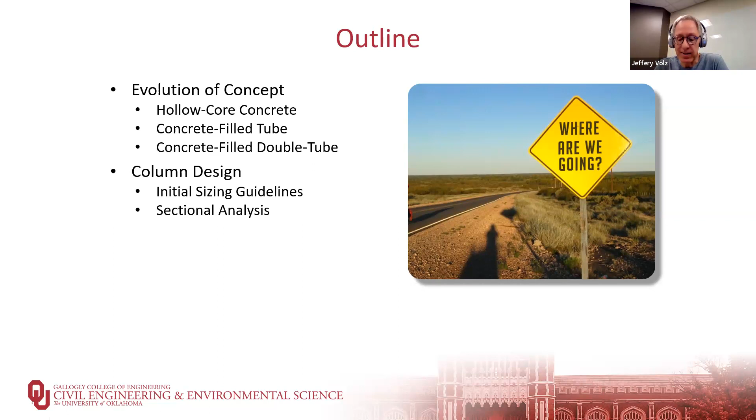I'll discuss a research project funded by the Oklahoma Department of Transportation, and a companion project funded by the ABC-UTC at Florida International. We'll talk about the specimen design and fabrication, the testing and results, and next steps in that research project. Then I'll have a number of thank-yous, because this project would not have been possible without a lot of people's help, and then I'll answer any questions you might have.

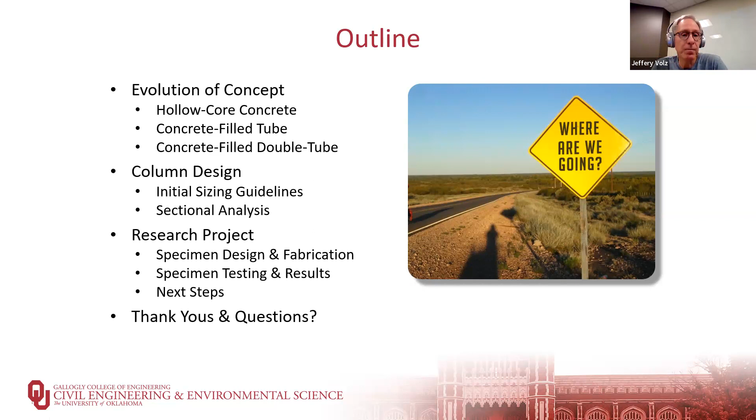Typical bridge piers will often consist of reinforced concrete columns, often circular, because it's a very efficient and relatively cost-effective method. Reinforced concrete has shown to have a high amount of ductility for some of these hazard conditions, but there are some downsides, not the least of which is the weight of these structures. So there have been attempts to reduce the weight of bridge columns and increase the speed of erection and construction of these columns, and we'll talk about all of those and how they impacted our current column design.

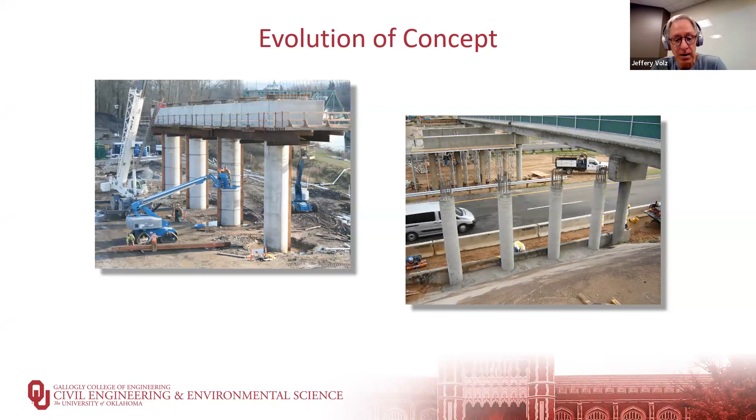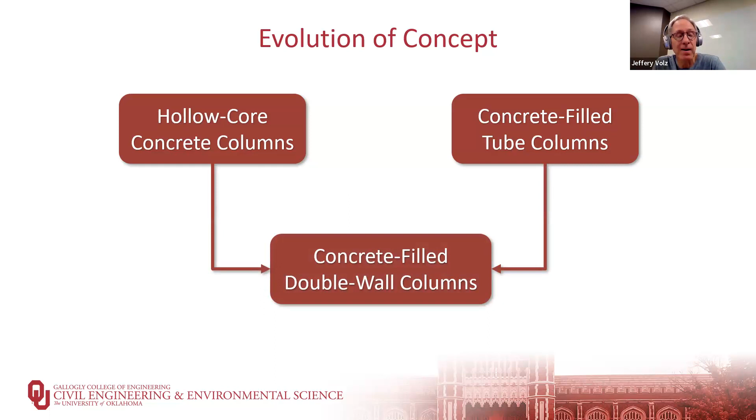Now I'm going to talk about hollow core concrete columns, reinforced concrete columns, and concrete filled tube columns. I have to talk about these sequentially, but in truth, these two concepts evolved in parallel and eventually came together in the concept I'm going to talk about today. So in terms of visualizing how these actually relate, even though I'll start with hollow core concrete columns and then move on to the concrete filled tube columns, all of that came together in the system we are talking about today.

So in particularly tall bridge piers or areas of high seismicity, engineers have looked at reducing the weight of our piers. We all understand that the columns are more efficient if we can get the material as far away from the neutral axis as possible. That increases the buckling resistance and increases the flexural resistance for less material.

Now this requires more formwork. You have to formwork on the inside and the outside of the column. And often to get the best performance, you need two layers of steel that are tied together as you would have in a typical reinforced concrete column. The reason that you need the inner and the outer layer tied together is because of the hollow core. The bars can buckle inward or outward, so you need both of them. But building that reinforcing cage is costly.

The other reason is if you have the potential for precasting these columns, you can reduce the weight of them to make them less costly for shipping and easier to erect.

Now, these columns are often tested in a constant axial load, increasing lateral load capacity. Basically, the typical specimen is a cantilever. It's fixed at the base, which is what our columns behave a lot in most of our bridge piers, fixed at the foundation and a cantilever extending upwards. They're tested with a constant axial load and a increasing lateral load based on certain loading protocols. And you see the load displacement behavior in the diagram on the right.

One of the important things to notice there is that those values up in the upper right-hand quadrant, that 2, 4, 6, and 8 mu, that is the drift ratio or ductility factor expressed as a percentage. So if you have a 10-foot tall column and it can displace up to 12 inches, then you have a ductility ratio of 10 or 10%. So you can see for this column, it behaves very well in its lateral loading.

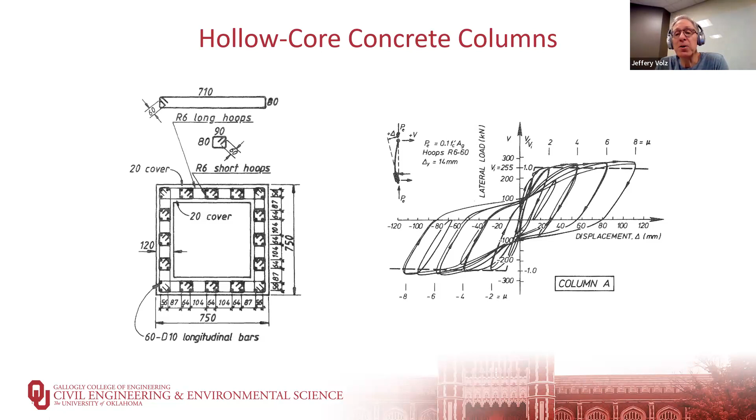This is a typical hysteresis loop. It's important to recognize that the area within the hysteresis loop is energy absorption, which helps us in these dynamic hazards that can impact our structures. So the more consistent and without degradation hysteresis loop we have, the better behavior. We see that this reinforced concrete hollow core column is behaving very well, up to a ductility ratio of 8%.

But that reinforcing cage takes a lot of manpower to build because of having to tie it together. And researchers have looked at the opportunity of using round columns, circular columns that are also hollow, with a single layer of longitudinal steel with a spiral around the outside.

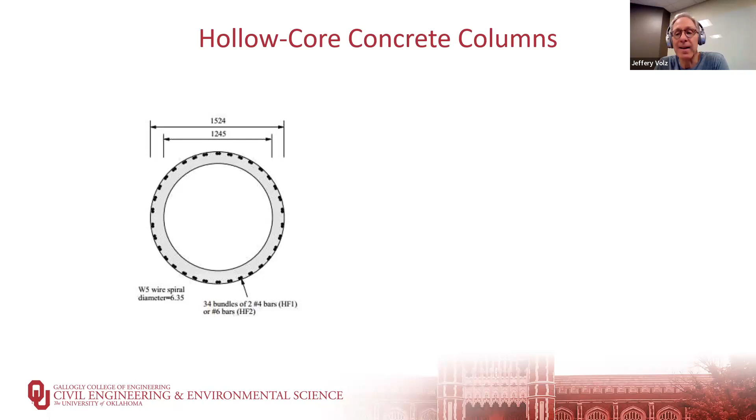And then they've tested those in a similar manner under a constant axial load and increasing lateral load. And you can see in this load deflection plot, the ductility is not as good. You can see we get up to a ductility ratio of about 3%. After that, we get significant failure of the column.

And that's because although the bars can't buckle outward because of the lateral tie, you only have the thickness of the concrete, which of course is poor in tension on the inside, and eventually the bars will buckle inward. So that's why it doesn't have as high a ductility ratio as that square column we looked at.

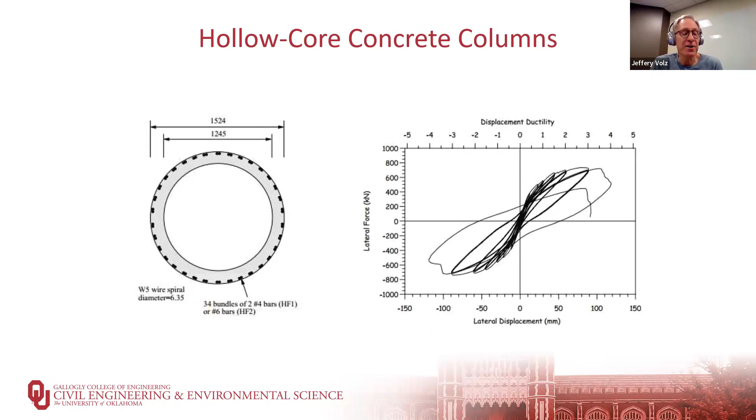Separate from hollow core concrete columns, we built a lot of concrete-filled steel tube columns. They have been used in the US. They are used very frequently in Europe and in Japan, where you use a steel tube that will also act as a stay-in-place form, which is filled with concrete to form your column.

Now, the great thing about this is you've eliminated the need for building a reinforcing cage, which is a significant time save. The steel tube acts as a stay-in-place form, so there's no formwork to erect and then remove, and it goes relatively rapidly. And this has been used in a number of instances.

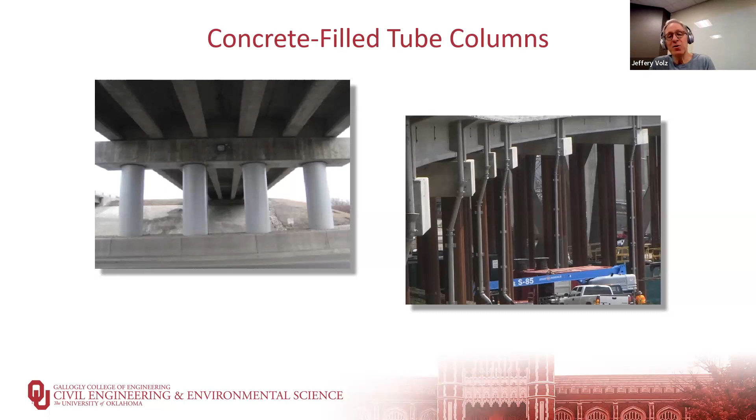It has a very good performance. If we look at the load deflection plot, same kind of specimen, fixed at the base, constant axial load, increasing lateral load, we get a very good hysteresis loop. It is a very stable hysteresis loop, which is important. And the column has reached a ductility ratio or drift ratio of 6% before it failed.

Now, it's not just that we keep that load deflection from degrading. We want basically as big an area within that hysteresis loop as possible, because that is energy absorption during a dynamic loading effect. And the more energy you absorb, the lower the resultant forces on the structure and the more durable it is in terms of strength. One of the problems, though, with these types of columns is we have to protect the steel from corrosion.

Steel is at a higher energy state, and because of that, it wants to return naturally to a lower energy state in the presence of moisture and oxygen, so it will rust. We have to paint them with epoxy-based paints or other types of paints to try and protect them, particularly in areas where we use a lot of road salt, because that will cause deterioration of the steel.

It'll start to corrode. Our bridge piers, the columns, if you have an overpass, are right in the splash zone, where that's actually the worst you can have, with constant wetting and drying combined with chlorides causing it to corrode. So that's one of the downsides. But still, it performs very well in terms of its ability to absorb energy.

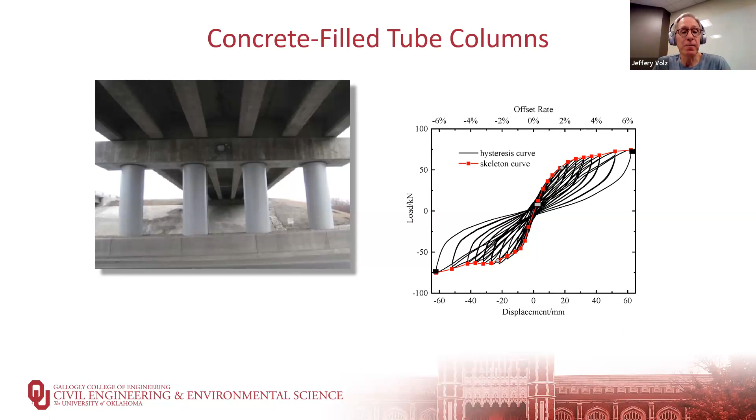There have also been developments where, instead of using that steel tube which can corrode, we instead use fiber reinforced polymer tubes that we fill with concrete. These evolved out of some of the initial applications of FRP in transportation infrastructure, which was to repair damaged existing infrastructure. One of the first applications was to wrap circular reinforced concrete columns that had either partially deteriorated or, in seismic regions, had an older design, to increase the resistance of the column.

That wrapping of the FRP helps protect it from external deleterious materials and also provides confinement to the concrete, which increases its energy absorption ability. So researchers and DOT officials decided, why don't we just build new columns with FRP tubes filled with concrete? That eliminates the problem we have with concrete-filled steel tube columns and gives us a more durable structure.

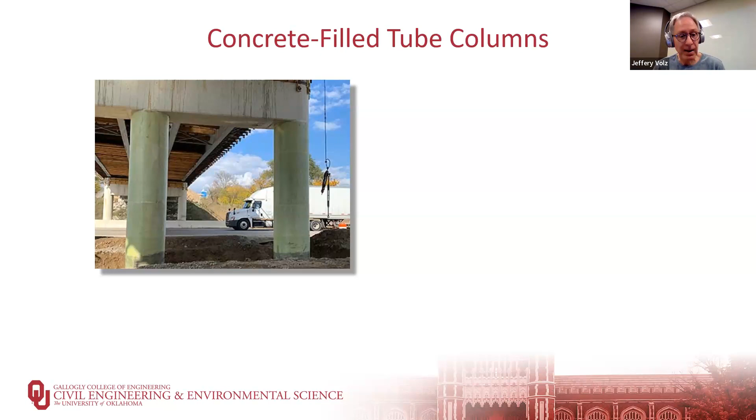Unfortunately, testing of those columns shows that they don't have as good energy absorption. That's primarily because FRP is a very linear elastic material up until failure, so it doesn't have the ability to yield like steel does and absorb energy.

You still get some nonlinear performance, so you do get a hysteresis loop that has some energy absorbing ability, but because of the behavior of the FRP, there's not as much area, not as much energy absorption, and not as much ductility. The column example on the right failed at about a ductility or drift ratio of 3%. Still an important performance improvement with regard to durability, but like all things, they have advantages and disadvantages, so you don't have as much energy absorption capability, and therefore the ability to resist these hazards.

So the idea for the column I'm going to talk about today melds the best parts of hollow core concrete columns, reinforced concrete columns, and steel and FRP filled concrete columns, and puts them together in a new system, which consists of an inner steel tube, an outer FRP tube, and sandwiched in between, a concrete core. So no reinforcing cage.

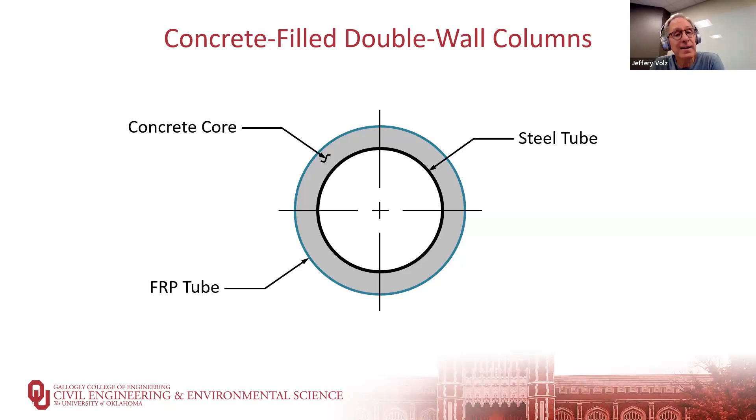We've eliminated the reinforcing cage and the cost and manpower to do that. We have the steel tube, which provides the ductility and energy absorption ability for the column. We have an FRP tube on the outside, which protects the inner steel tube. Both it and the concrete together help protect the inner steel tube. The inner and outer tubes act as stay-in-place forms, so there's no formwork.

Both of those tubes also provide a high degree of confinement to the concrete. As you know, when you test concrete in compression, what we call uniaxial compressive strength, or f'c values, that cylinder actually doesn't fail in compression. It fails due to the tension strains perpendicular to the compressive load. If you had a loading system with almost no friction at the loading heads, instead of getting the typical conical failures, you would get a series of vertical cracks when that concrete fails.

The idea is that if you take a ball of concrete and drop it into the deepest part of the ocean, it will never fail in compression because it's under high hydrostatic pressure, and you can get astronomically high compressive stresses. That's the same principle here, where the inner steel tube and the outer FRP tube provide confinement to the concrete, so it has a much higher apparent strength than its uniaxial compressive strength.

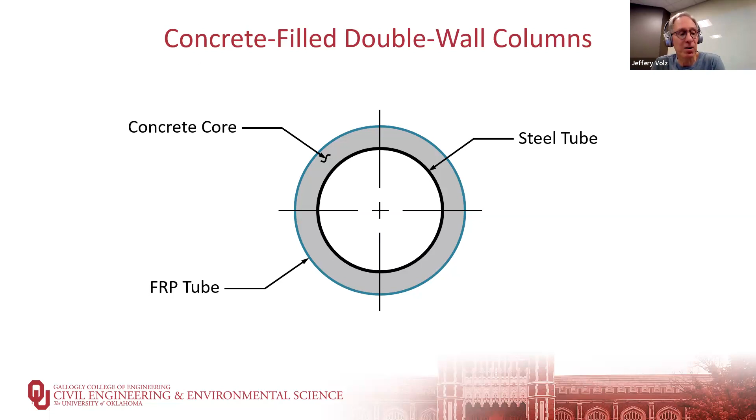In terms of how you would construct these columns for your bridge pier, first you would excavate for the foundation. In this case, I show it as a drilled shaft.

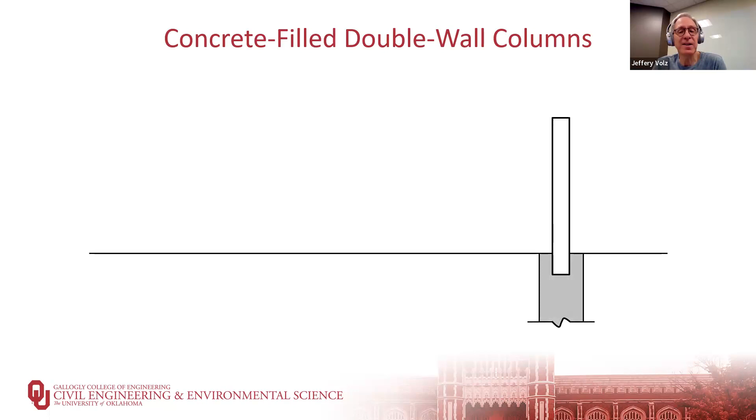Place the steel tube into the foundation, which could be a drilled shaft or a spread footing. Place the concrete in the foundation that anchors the steel tube. Drop the FRP tube over the top, then fill the annular space between the steel tube and the FRP tube with concrete. Once you have a number of piers and columns, you can erect the pier cap, form it, and add the reinforcement.

Theoretically, you could construct these columns in as little as 2 days. Once you place the steel tube into the foundation, place the concrete for the foundation that day. The next day, you can drop the FRP tube into place, pour the concrete at the annular space, and the column's done. No formwork, no reinforcing cage, and very much accelerated bridge construction. Once you have all of the columns for a pier, then you can form the bridge cap and pour that.

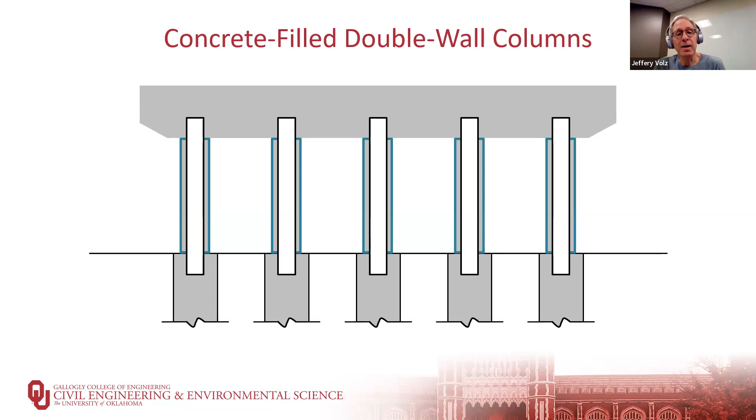In terms of how we can actually size these columns, there are some guidelines being developed and continuing to be refined. First, you select an initial diameter for the column, and you can use typical column diameters for reinforced concrete as a starting point. Again, design is an iterative approach. We don't know what the answer is until we know the answer. So there is always necessarily some iteration. As more of these designs occur, we start to get a better feeling for where to start.

The concrete wall thickness is between 10 and 15% of the overall diameter. So if you have an 18-inch diameter column, you have between a 1.8 and 2.7 inch thick concrete section. The steel tube diameter is simply the outer diameter minus twice the thickness. The thickness of the steel tube is between 1/64th and 1/32nd of the diameter of the steel tube.

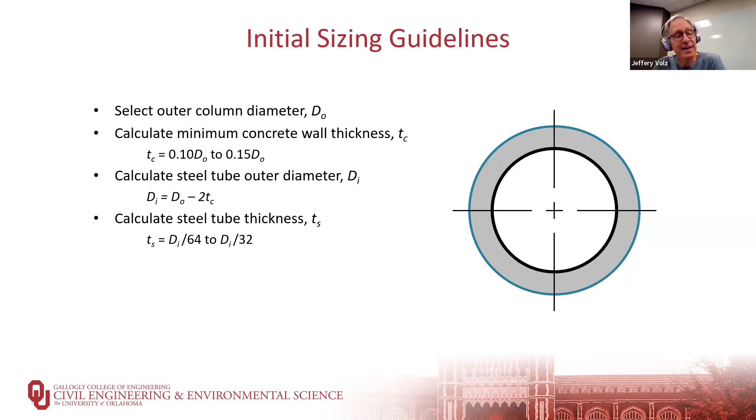At the lower end, 1/64th of the diameter, you have the tendency for more frequent or common buckling of the steel tube. At the thicker end, that would tend to eliminate some of the buckling, but it increases the cost and increases the weight.

It's important to recognize that the benefit of that concrete core is it reduces the tendency of the steel tube to buckle, and the FRP tube to buckle. We'll talk about that during our actual test. So again, all three of these materials help each other. The steel and the FRP act as stay-in-place forms. The steel provides the ductility, the FRP provides the protection and the durability. They provide confinement to the concrete, and the concrete prevents local buckling and global buckling of the steel tube.

The FRP thickness is a function of the diameter of the FRP and the ratio of the compressive strength of the concrete, the 28-day uniaxial compressive strength, and the hoop tension capacity, F sub T, of the FRP. If you're in a low seismic region, where you're not going to have as high of strains during one of these hazards, there's a 3.5% value for the thickness. If you're in a high seismic region, such as California or Japan, then you're up to 10.5% of that ratio. Again, these are just guidelines to get you close so that you can then do a more detailed analysis.

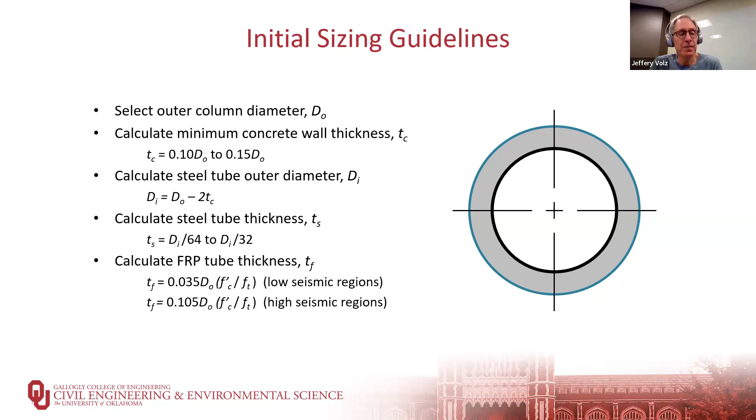So then we would do a sectional analysis, which is very similar to how we analyze reinforced concrete columns or steel composite columns. We discretize or segment the cross-section into a series of strips. Because it's a circular column, you need smaller strips than if it was a rectangular or square column.

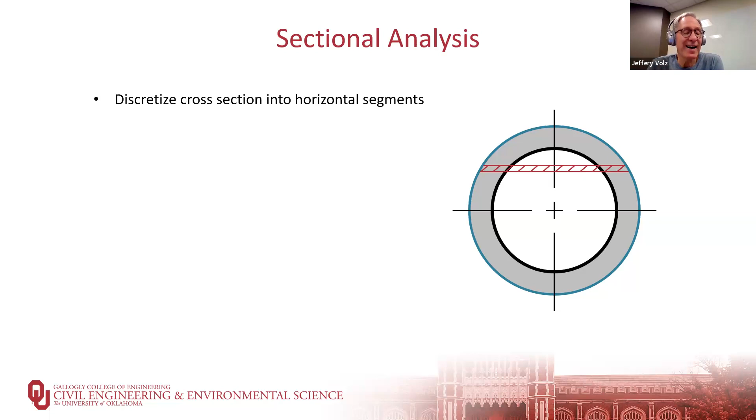Then we perform a nonlinear strain compatibility analysis, exactly what we do for reinforced concrete. We assume a neutral axis location, and based on plane sections remaining plane, the Navier-Bernoulli beam theory, we can calculate the strains at each layer based on its distance from the neutral axis, because the strain diagram is simply linear. Once you have those strains, you go to the stress-strain diagram for the concrete and the steel and calculate the resultant stress. From the stress and the area of our strip, you have a force, and then you sum those forces around the plastic neutral axis to calculate the axial load and moment that would cause that strain distribution.

From those, you can generate an interaction diagram, just like we would generate an interaction diagram for reinforced concrete. Or if you're looking for a specific moment and axial load, then you'd have to iterate to that solution. Typical assumptions, again, are that plane sections remain plane. The power of that is that the strain diagram is linear.

We assume a perfect bond between the steel and the concrete. That's the strain compatibility part. Where the concrete touches the steel, they both undergo the exact same strain.

There's no slippage. We can use an elastic, perfectly plastic stress strain diagram for the steel, where we have linear stress strain behavior up until yield and then a plateau. We can also make it more refined by including strain hardening if we would want to.

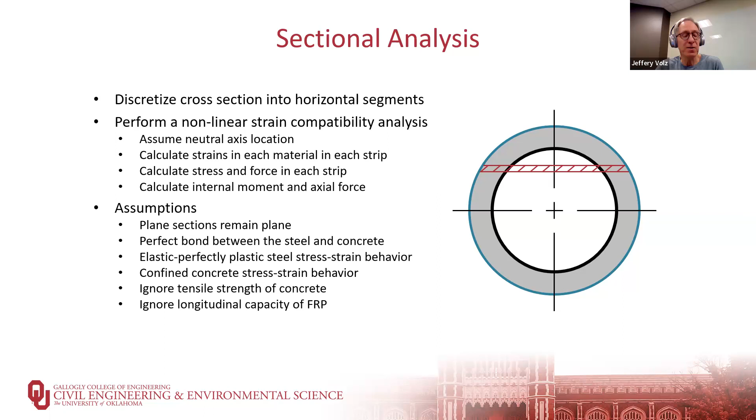Just excuse me for a second, I'm going to take a quick drink.

This is a very typical one. It's the same specimen type used for the hollow core rectangular and circular columns and for the steel filled, concrete filled steel tubes and FRP tubes.

It consists of a base or a footing. The column is fixed at that point, so it extends out of the footing. And then at the top, we place a loading stub where we can apply the lateral load and a constant axial load.

Now, these columns that I'm talking about today go by the acronym HCFCS, which simply stands for hollow core FRP concrete steel columns. We also designed, fabricated, and tested a reinforced concrete column for comparison, which I'll talk more about in a minute.

Our column we selected in terms of what would work in our lab, we have a column height of 8 feet. That's from the top of the footing to the application point of the cyclic lateral load. The FRP outer diameter, we're essentially testing half scale columns. And we wanted to be in the range of 18 to 24 inches.

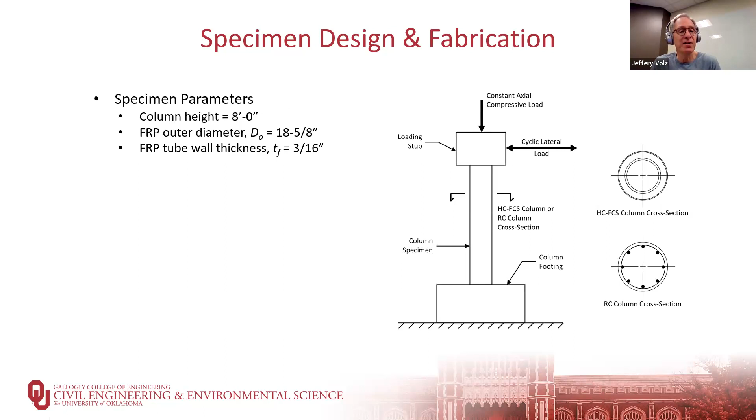The steel tube has a diameter of 12 3/4 of an inch and a thickness of 1/4 inch, and that's also on the lower bound. That is the 1/64th of the diameter, so you have a higher tendency for buckling as opposed to a thicker one.

But again, that concrete core is going to provide a significant amount of buckling resistance to the steel tube. And then the resulting concrete wall thickness is 2 3/4 of an inch.

In terms of material parameters, the FRP tube is glass fiber reinforced polymers, commonly referred to as fiberglass. The fibers are glass, and the polymer can be either epoxy or other types. It has a 40 KSI hoop tensile strength. That's fairly typical and is a minimum value for this application.

And that's a critical design parameter because that FRP provides the confinement. That concrete wants to expand when it's under compression, and by confining it, you get a much higher apparent strength.

The steel tube is an API 5L-X52, which has a yield strength of 52 KSI and an ultimate tensile strength of 66 KSI. That is very close to an ASTM A500 grade C steel.

The API designation is very common in the oil and gas industry, which is what is readily available in the state of Oklahoma. But again, it's very close to an ASTM A500 grade C. The concrete core, this is where we're pushing this concept farther in our research project.

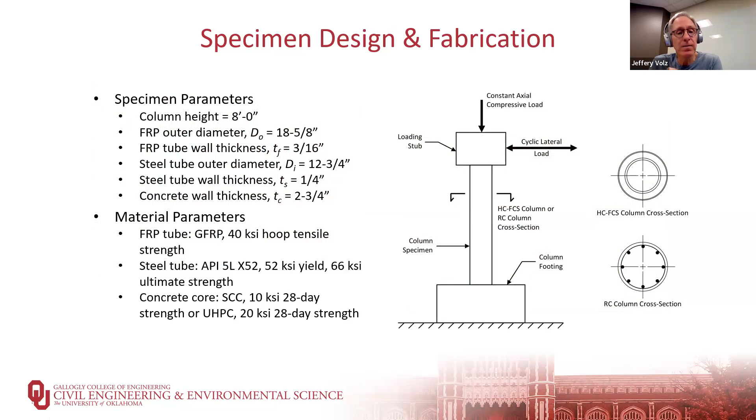At Fears lab, we have a strong floor where we do a lot of our testing, but we do not have a strong wall, which a lot of times you use to push horizontally when testing columns. We don't have that, so we actually have to lay the column over on its side and design a test frame that attaches to our strong floor in order to test these columns.

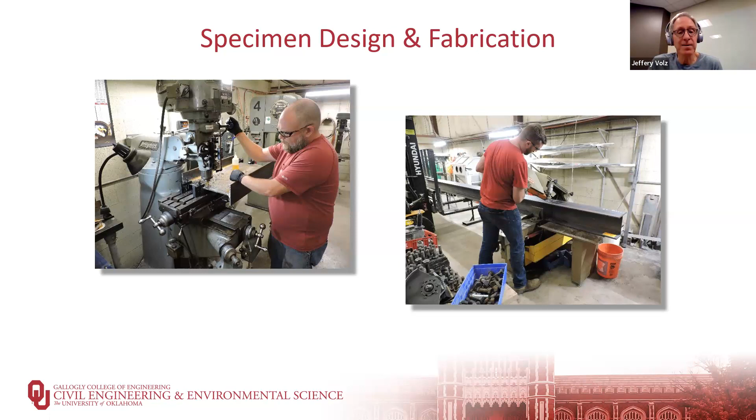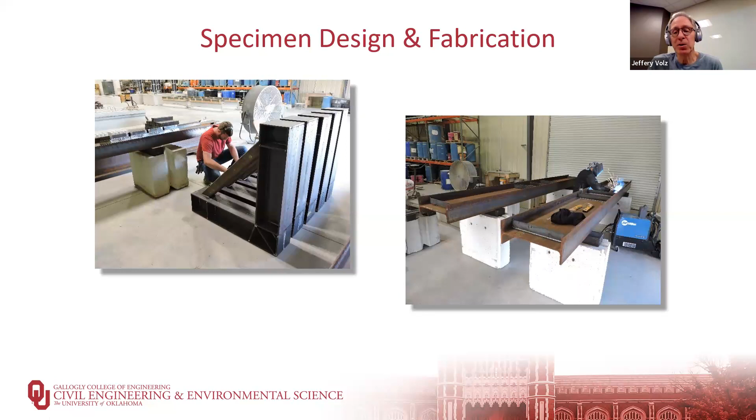Not only did they have to drill over 200 holes for the high strength bolts, there was also nearly 400 feet of welding, both for the main steel members, which were W24 by 68, and all of the braces and connections.

Here you can see the steel frame in place, bolted down to our strong floor at Fears lab. The steel was donated primarily from W&W Steel and helped us bring this project to fruition.

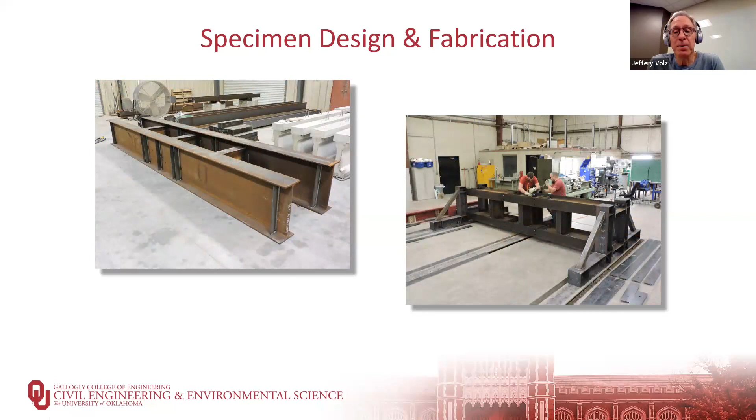We have a separate task as part of this research project investigating different depths of embedment and ways to embed the steel, including ways to do a precast, prefabricated column that is actually installed into the foundation.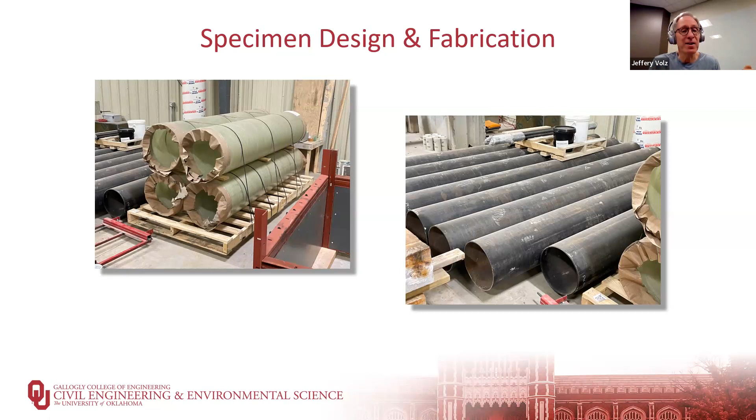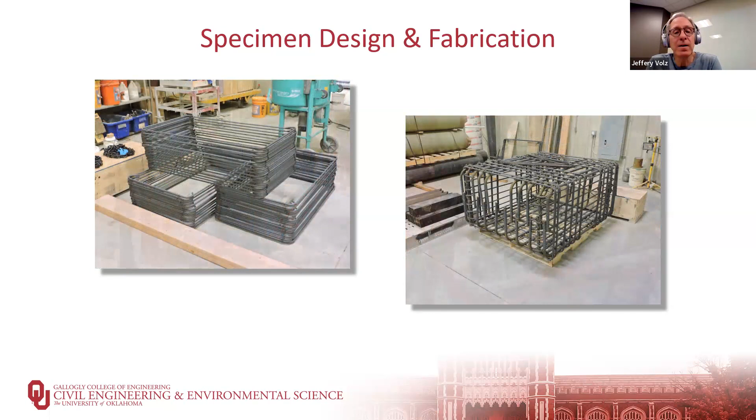Here we have the reinforcement for the base of the column, a reinforced concrete base, placed into the formwork. The white tubes in the formwork provide holes for high strength steel rods that will bolt the column base to the steel frame.

We place the cage into the frame and formwork, and place the steel into the formwork at the right depth and location, making sure it's vertical. On the left picture, it's held in place by a couple of angles cantilevering off of one of our steel columns.

Because of the large amount of concrete here, we could not mix this in the lab, so we had it ready mixed from Dolese, a wonderful partner in this project who donated materials, whether it's ready mixed concrete or raw materials for the concretes. Here we're placing it into the form.

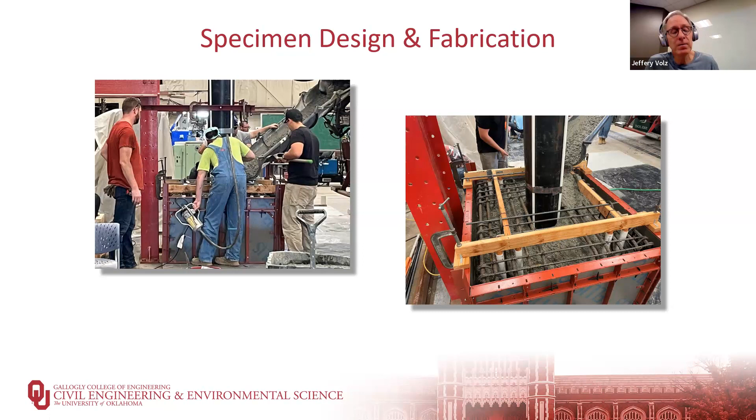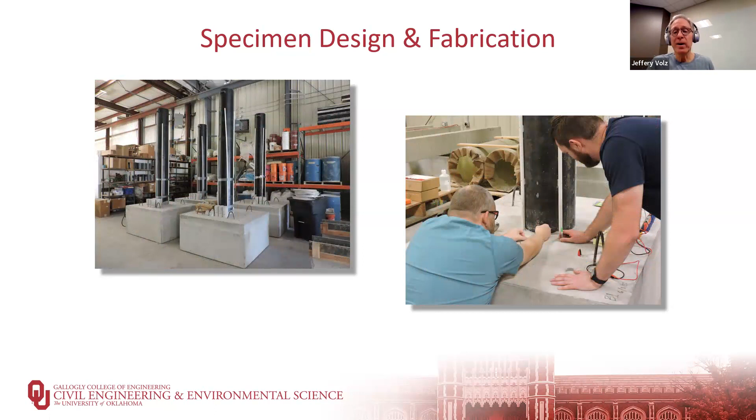On the left are 4 of the column bases with the steel tubes already in place and cured. On the right, we are installing strain gauges on the steel tube. We installed a series of 8 strain gauges, 4 in each row at the cardinal points of the steel tube to measure strains in the longitudinal direction. The first row is at 3 inches above the column base, and the second row is at 9 inches above the column base. You can see one of the strain gauges on the right.

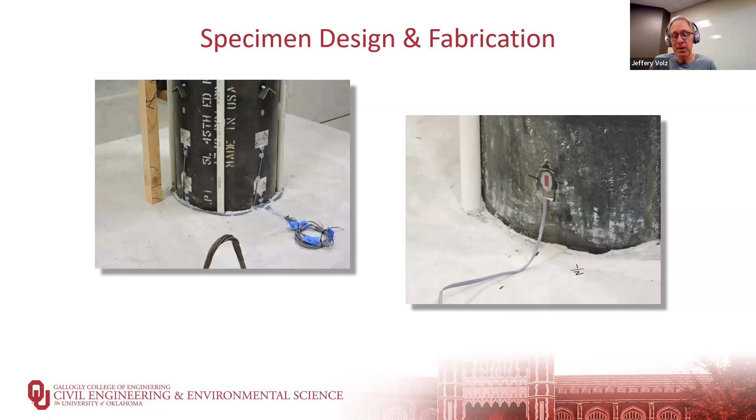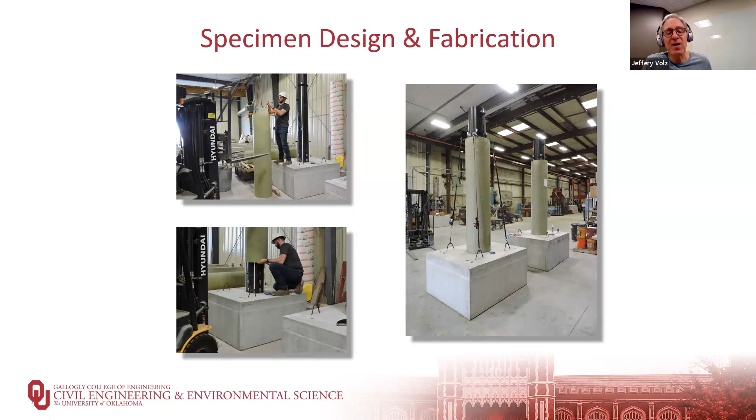Once the strain gauges were in place, we could lower the FRP tube into place. Now you can just use spacers to get the FRP tube centered about the steel tube, because the steel tube is locked in place now after the base foundation cures. The right depth spacers can hold the FRP tube in place. But to make sure that it was anchored well, we also developed a halo system on the top and tied it down with some ratchet straps to get ready for placing the concrete in the core.

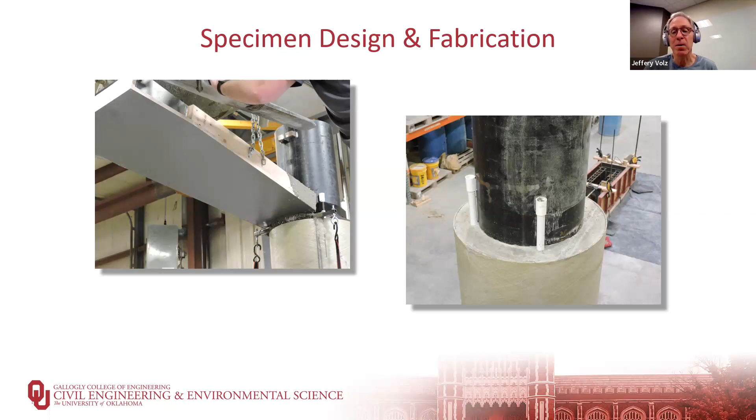This is one of the SCC columns with the concrete being placed with a chute that we fabricated to lower the concrete from our concrete bucket into that annular space. This is a self-consolidating concrete. It flowed very well, with about a 26 to 28 inch spread. It consisted of 3/8 inch maximum aggregate because of the only 2 3/4 inch thickness of the concrete. We didn't want to use a larger aggregate. It flowed very well with no external or internal vibration, and filled up that annular space extremely well.

And then here we have one of the FRP columns, our UHPC columns, placing that again with the same chute. It flows under its own weight. For those of you familiar with UHPC, it's a very unusual concrete. It only has cementitious materials and sand and an awful lot of high range water reducers. It's very flowable, but it's also very sticky, tends to stick together. It's kind of like, I'm probably dating myself, but it's like Nickelodeon slime, except instead of being green, it's actually a dark gray, almost black. It flows extremely well and fills up that 7 foot tall column with no external vibration and completely fills that annular space.

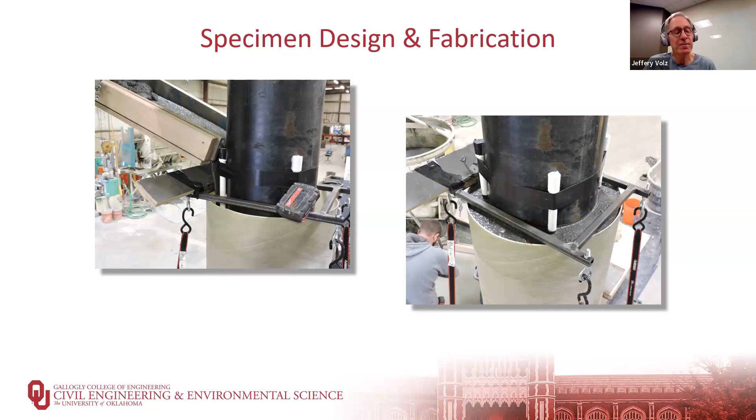We also designed and constructed a reinforced concrete column with a nominal 18 inch diameter. The reason we wanted to do that, even though these columns have been tested to death, is because we wanted to make sure that our testing system and our loading protocol gave us the right kind of response before we put in these new columns, our HCFCS columns. It's an 18 inch nominal diameter using a sonotube for the form, with 8 number 6 bars for longitudinal reinforcement, giving a reinforcement ratio of about 1.3%.

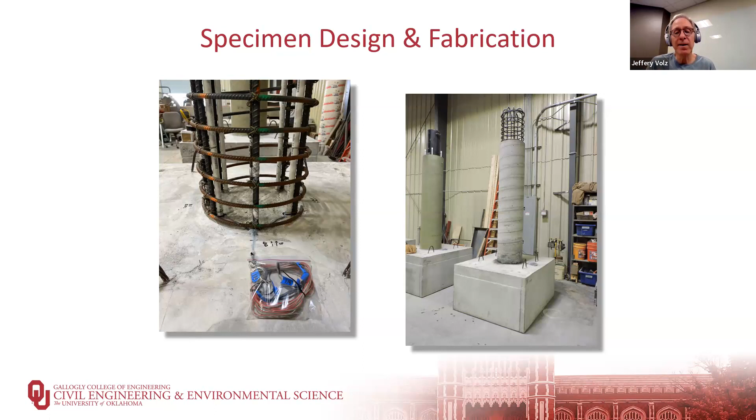Now, unfortunately, we only have a 5-ton overhead crane in our lab. And if we were to cast the loading stub on top of our column, they would weigh more than 10,000 pounds and we wouldn't be able to move them around the lab. So we actually had to tip the columns over, move them into the test frame, anchor them to the test frame, and then fabricate the reinforcing cage and the formwork to install the loading stub.

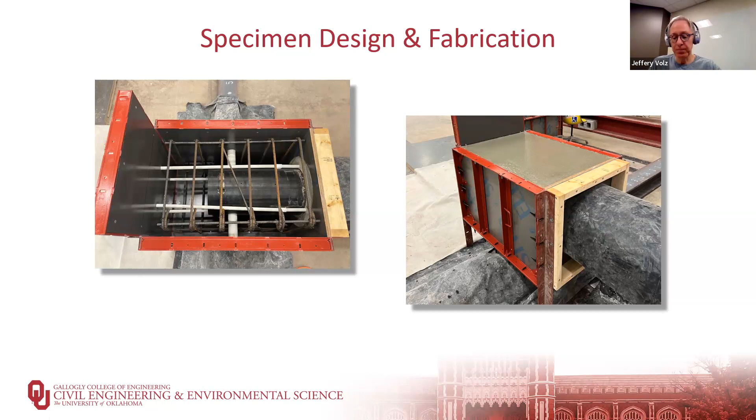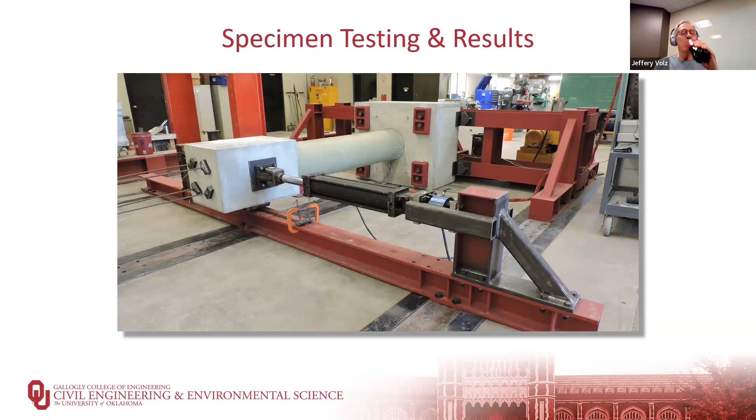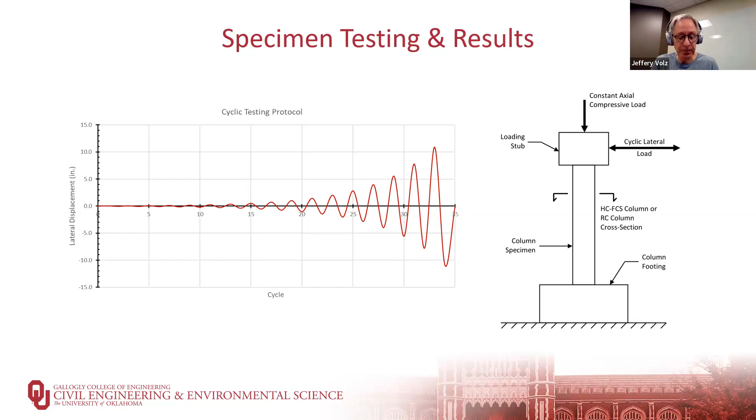So I now want to talk about the load displacement response. Just like the load displacement responses I showed you for the hollow core concrete columns and the concrete filled steel and FRP columns, we want to look at the same behavior. Because when you come up with a new structural system, a new structural element, civil engineers, and I'm one of them, particularly structural engineers, we're a conservative bunch. We want people to show us how these new things are going to work before we put them in our bridges that people are going to go over. So we want to test them the same way and see how they respond, so we can compare to them and develop a level of comfort that will leave the public in a safe situation.

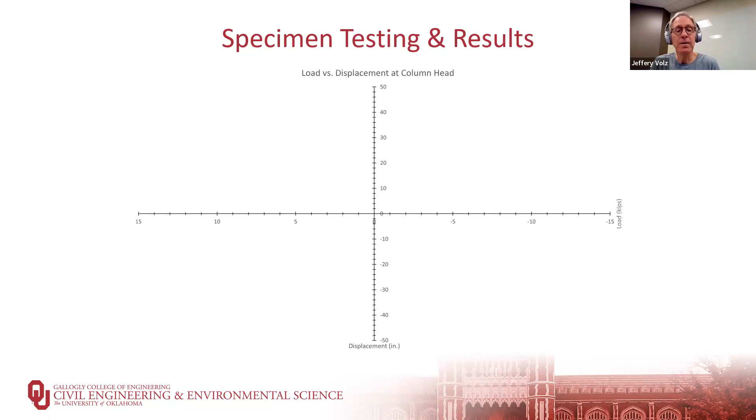So first, we wanted to look at the behavior of our reinforced concrete column. That was so that we could feel comfortable with the response, so that we would feel comfortable doing these new columns, because this test fixture is unique. And if you look at the behavior of it, it performed as a typical reinforced concrete column.

You have initial linear elastic response when the deflections are low. All the materials, the steel and the concrete, are behaving linearly elastically, which is exactly what it should do. At some point, you begin to crack the concrete in tension. And because it's a cyclic loading where you go in both directions, you're going to crack it on one side that's in tension, and crack it on the other side when you reverse the load. So eventually you start to become nonlinear once you crack the concrete.

The other thing is you have a cold joint between the concrete and the column base, which is typical of construction. You're going to have a cold joint there, which is okay because we don't count on the tension capacity of concrete in our capacities. So whether it's a crack that forms or it's a cold joint, that's what the reinforcing is for.

The concrete starts to become nonlinear once you start exceeding about 40% of the ultimate compressive strain, and the steel bars start to become nonlinear. So eventually you start yielding the bars. Remember, this is a circular column, so you're going to start to yield the bars that are farthest from the neutral axis first. Once those start to yield and go through additional strain, you're going to start to yield the bars that are closer to the neutral axis, closer and closer.

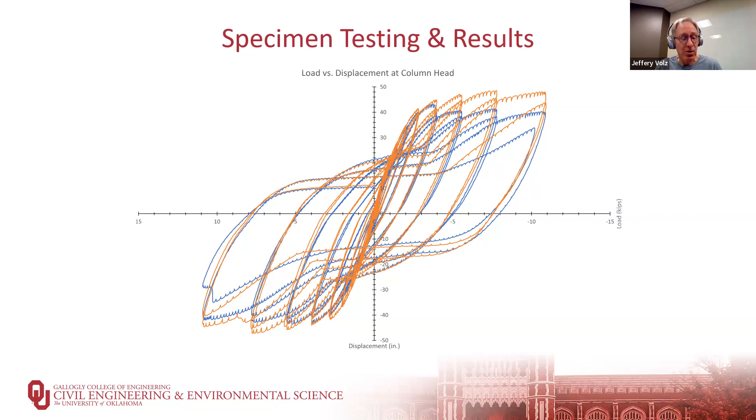So again, the important thing is to recognize that the only difference between these two specimens is the core concrete. The UHPC apparently provided more capacity, perhaps more buckling resistance to the steel tube, because the longer you can go before that steel tube buckles, if you can fully yield that cross section and reach the plastic moment capacity of that steel tube, you're optimizing that material. It can't get any better than that. That's the ultimate goal. If it buckles, you're not using the material as efficiently.

And then here is an overlay of all three. This yellow plot is the reinforced concrete column. The blue again is the SCC column, and the orange is the UHPC column.

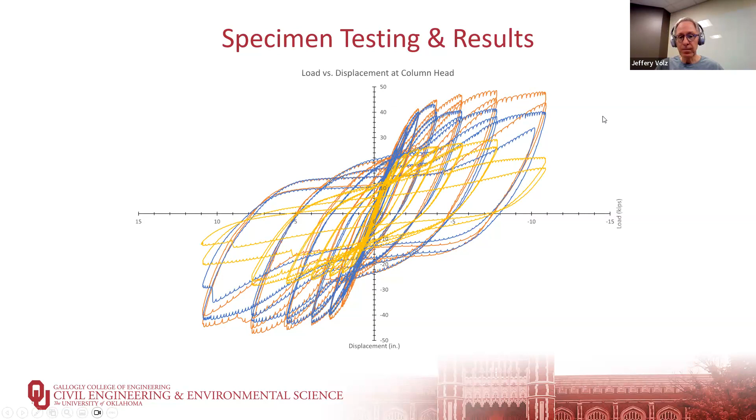Now, once we ran the test, we of course observed them during the test, when you can learn a lot. And we also did forensic examination when the test was over.

So here we have the reinforced concrete column. Typically, when we test reinforced concrete columns in this manner, we will paint them white with a combination of white paint and water, so to make the cracks more evident during the testing. So here you've got the column ready for testing. We started to cycle it.

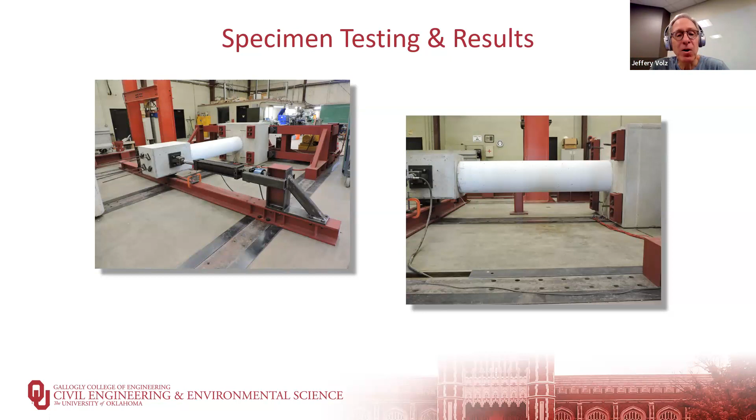On the left are some of the initial cycles. Those black lines on the column are cracks in the concrete, right? The concrete is weak in tension. It's going to crack in tension. Since we're pushing it and pulling it in both directions, you're going to get cracks on both sides, so you get these transverse cracks. Nice spacing on the cracks, about 6 inches on center.

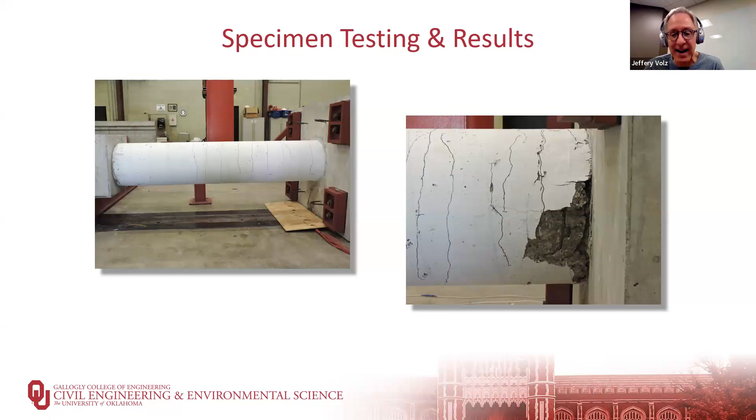Great behavior. On the right is where we've increased the cycles even more. We get more cracking, and what typically happens in a test like this for reinforced concrete, you start to spall the cover off because there's nothing holding the cover on other than tensile strength of the cover bonded to the concrete on the inside. So it's very typical to start spalling off the concrete.

On the left, more cycles. You can't see it very well, but here we've actually fractured this bar, which is the bar that's farthest away from the neutral axis. It happened to fracture very near where we had a strain gauge on it, so you can't see it very well. These two bars are still okay.

More cycles for the picture on the right. You can see that we've now buckled that top bar and we've buckled that bottom bar.

And there you can see a close-up. Again, we've buckled this top bar, even though the spiral is there to prevent buckling, the concrete is there to prevent buckling. But as you put higher and higher cycles, you're going to start to rubbleize the concrete in the core. And so it provides less and less resistance to the longitudinal bars buckling.

And then on the other side of the column, it suffered the same type of damage. Here you can see this bar on the top, looks like it was sliced through with a knife through butter. It goes with the crack in the concrete, but this is fractured. This bar is fractured. This bar is fractured. And, which is not uncommon, this bar down here is pristine, still carrying load. Just, because nothing is perfectly symmetrical.

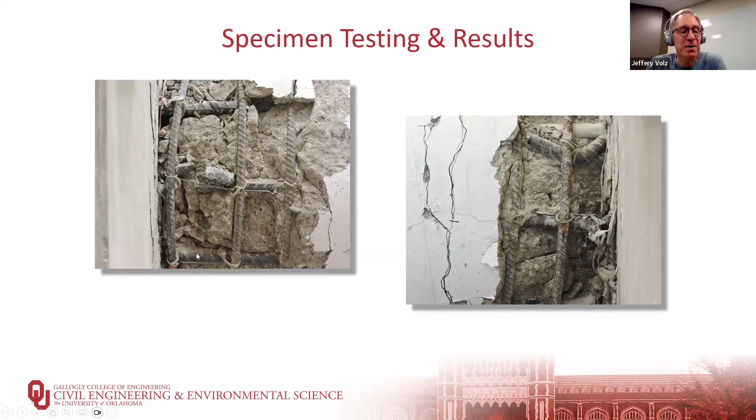So that's the behavior of the reinforced concrete column, very typical. Then we look at the FRP column. First, the SCC filled FRP steel column.

Now, unlike the reinforced concrete, you can hear this thing going through damage, but you can't see it because of the FRP on the outside. So the only thing you can see is how the FRP is performing. And you can see in the picture on the left, this is the column pushed all the way over 11 inches. And again, we went in both directions. So a total displacement of 22 inches.

At the bottom of it, where the FRP comes in contact with the concrete base, you see some white there. If you see a close-up on the right, you can see that this white is where the FRP has started to split. And here it's actually fractured. These are the strain gauges measuring the hoop strain in the FRP during testing. And here, the compression has gotten so high on the concrete that we've exceeded that 40 KSI hoop stress for the FRP.

We then circumferentially cut the FRP and then slice it longitudinally to peel it off and to look at the concrete underneath. And here you can see the concrete underneath was confined very well. You can see it's in much better shape than the concrete for the reinforced concrete column, right? There's a lot of cracking, right? There's some spalling, and the concrete has started to break up into pieces, but it's fairly well intact.

So that FRP is providing a significant amount of confinement. And again, this is at a drift ratio of over 10%, almost 11%. That's a lot of displacement, right? That's 22 inches of displacement for a 96-inch tall column.

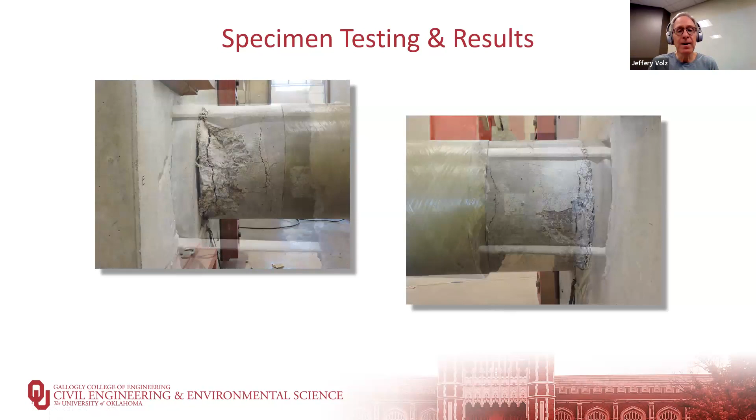Then we remove the concrete. We had to jackhammer the concrete to get it out. And we start looking at the steel tube, from one side on the right and the other side from the left. And you can obviously see where it has buckled, here, on the other side, closer to it, and here.

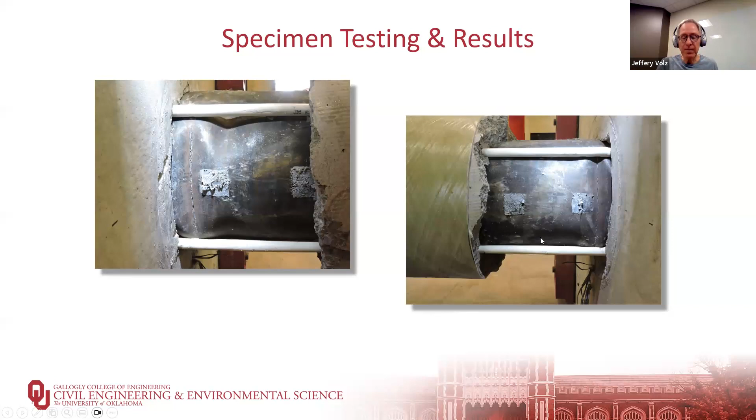Now, the important thing is understanding this buckling, because I talked about the fact that the concrete core provides buckling resistance for the steel tube. At first, you kind of scratch your head and go, yeah, but it's hollow on the inside. It can buckle inward. The concrete's only going to keep it from buckling outward.

That's true, but if you think of this steel, if you take a strip of this steel, similar to a ring that you put on your finger, it can't buckle everywhere inward. If it were to, in order to do that, you would place a hoop compression strain because you're trying to push material into a smaller diameter.

If you test steel tubes under compression, if you've looked at any other testing, you'll see when they buckle both inward and outward, not in the same location. So they might buckle inward on the two opposite sides and outward on the other two opposite sides. That's the least energy state.

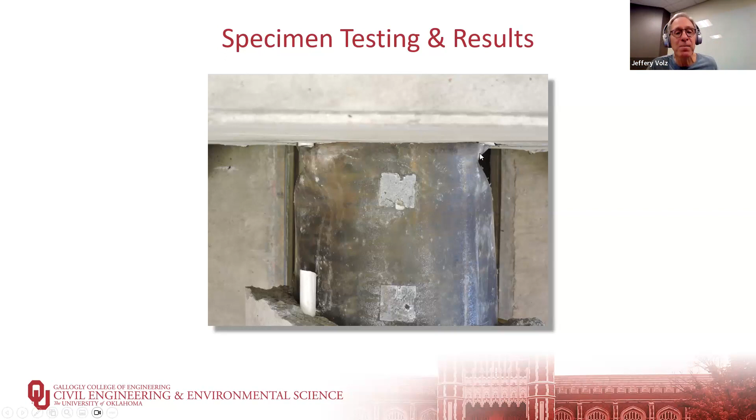But that concrete is confining it, so you get really a three-dimensional buckling state. This is how the concrete confines the steel from buckling. That is at a much higher energy state, much more capacity.

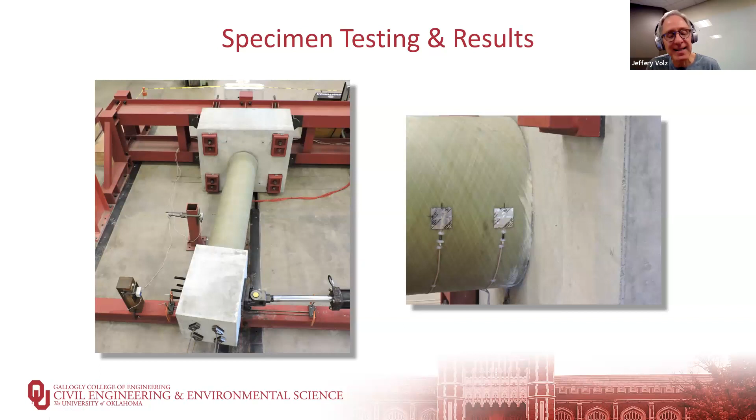Then we get to the UHPC column, same kind of thing. You can hear it breaking, but you can't see it. Here's the column pushed all the way over. Here, the FRP has not split as much at the same displacement, the same cycling. That might be because the UHPC is providing more confinement.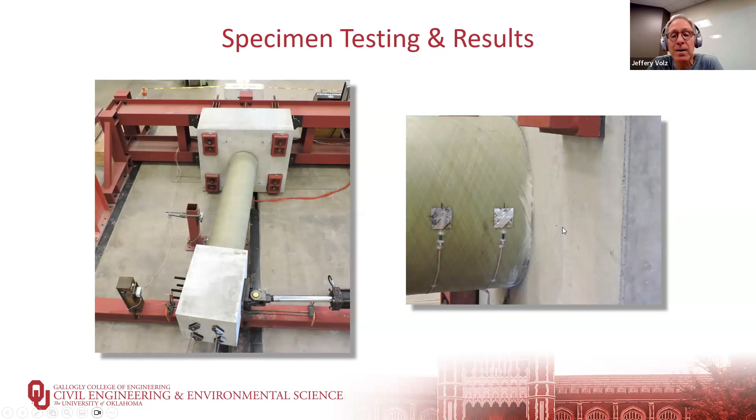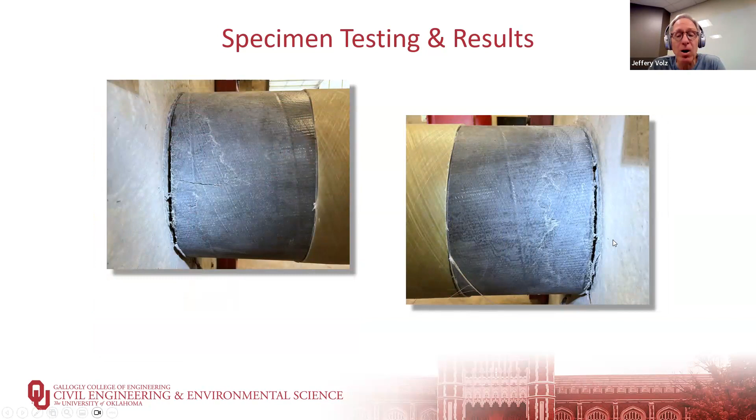And then when we cut the FRP away, you can see that the UHPC is in phenomenal shape. There is cracking, there is some more cracking here, but you really have to look hard to find it. And there is literally no spalling. It is staying fairly intact.

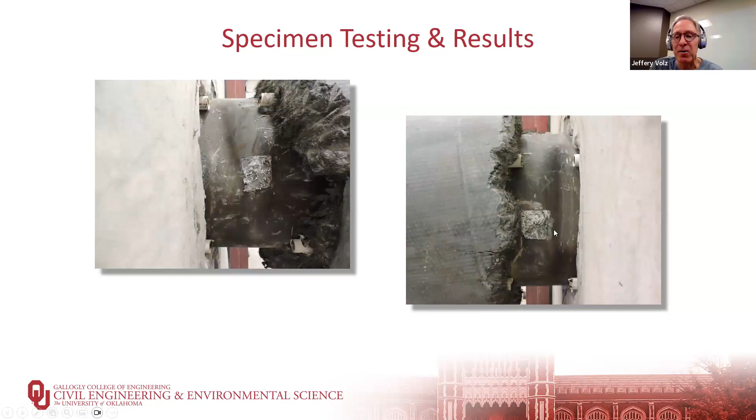You excavate that out of the way and you look at the tube and you get the same kind of response. We get buckling of the tube, more of a three-dimensional nature. And if we look down at the tube from the top, again, you can see this more three-dimensional nature of buckling, most of it buckling inward, but at different locations.

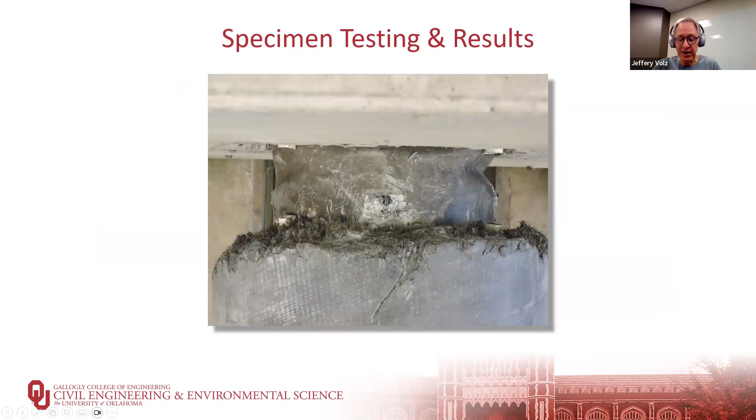In terms of our next steps for this research project, we're going to look at reducing the thickness of the concrete core and using the same steel tube, smaller diameter, same thickness FRP tube. We're going to go from 18 inches down to nominal 16-inch diameter. We're also going to look at the potential for increasing the steel tube thickness a little bit to see how that helps in terms of adding capacity.

We're also examining in another task the development length, how far we have to embed the steel tube into the foundation and into the pier cap to fully develop it.

Yeah, I thought the same way too, because normally that's how we are used to seeing it.

The next question is, what is the actual capacity, the load capacity? Is it 49 kips or something else? Good question. We calculated a capacity of these columns at about 42 kips, for an average compressive strength of 15,000 psi, sort of middle of the range. This was just more to get us a feel, and it behaved very close to what we calculated with our nonlinear strain compatibility analysis - fairly close to it. And you're right, eventually it would be better, or another way of displaying this information, would be to show the plots where the vertical scale is a function of the static capacity. It's often shown like that.

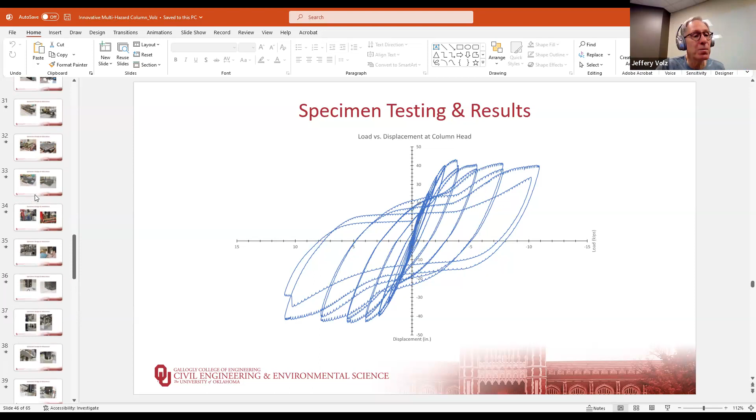Is there any particular reason for the thicknesses and dimensions you selected for your testing? Yes, we went by the current design guidelines, these initial sizing guidelines, which give you a starting point. You have to pick an exterior diameter first—that has to be your starting point.

In an actual column, you could use roughly the same sized diameters as you would select for a reinforced concrete column as a starting point, and then follow these guidelines. They give you the thickness range for the concrete, the diameter and thickness range for the steel tube, and the diameter and thickness range for the FRP tube.

Those ratios for the steel tube—1/64th at the lower end—give you the thinnest option, with more tendency for buckling. As you make it thicker, at 1/32nd, you'll have less buckling. If you're in a high seismic region, you'll want that thicker FRP thickness because you're going to have much higher strains. That's the big thing about seismic—it isn't necessarily that the forces are higher than from other types of vehicular loading; the strains are so high because the displacements are so high.

So with those strains, you're going to have a thicker FRP because you're going to have much higher compressive strains in that concrete core, and it's going to want to expand because of Poisson's effect, and that's how the FRP restrains the concrete. Excellent. So these are good starting points, but again, you'll want to do a more detailed analysis.

Next one is also a very interesting question: it appears that failure occurs at the connections, or near the connection. So with this in mind, is the steel tube really making much difference in the middle of the column?